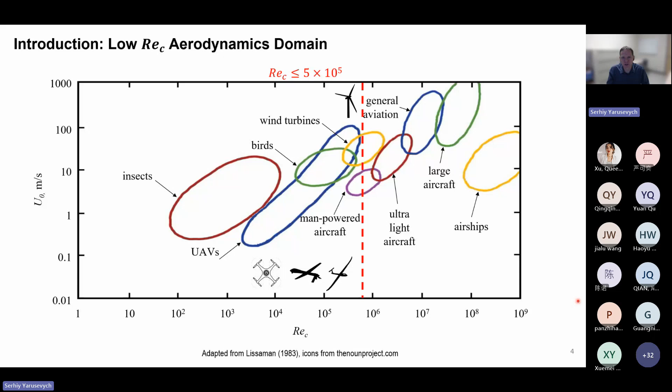Aerodynamics is quite different here from classical aerodynamics and warrants special attention for the prediction of flow development as well as the performance of the systems. In particular, what happens at low Reynolds number on the suction side is that the flow is exposed to the adverse pressure gradient, as illustrated here.

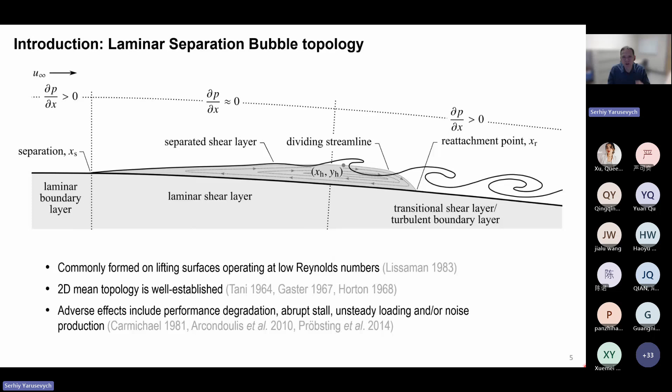I'm going to superpose on this cartoon an actual video of a laminar separation bubble visualized using smoke injection into the separated shear layer, and you will see that the phenomenon is quite dynamic. In the separated region, the flow is fairly laminar, and undulations start to develop, leading to the formation of periodic shedding of vortical structures. You can see quite rich dynamics of these structures. Some of them merge, but all of them start to break down close to the time-averaged reattachment point.

This phenomenon has been investigated since the 60s of the last century, and adverse effects associated with it include performance degradation of the airfoil, abrupt stall, unsteady loading, and noise production. This is why it's important to predict and understand this process on the suction side of the wing. The transition to turbulence plays a key role because it actually determines whether or not the flow reattaches or the airfoil stalls past separation, so stability considerations become quite important.

That's our next stop here. In the discussion, I would like to highlight that we will primarily focus on some of the results produced by our group. There are plenty of other research findings and many excellent papers on the topic, but I'll use our results nonetheless to provide a holistic summary of the state of the art in this area.

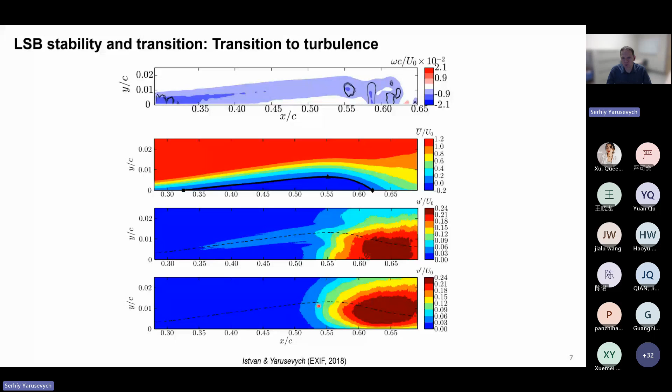The other two images show root mean square fluctuating velocity components, the wall-tangent and wall-normal, respectively. Along the separated shear layer, marked by the displacement thickness in the dashed line, you see amplification of disturbances that takes place quite rapidly and peaks around the reattachment region. With the wall-normal component, we see a similar story.

In the frequency domain, doing spectral analysis of these fluctuations, I can plot the Strouhal number, which is a non-dimensional frequency, in this case using the chord and free stream velocity for normalization, against the streamwise distance along the surface. We can identify that perturbations start to get amplified within a certain band of frequencies. Eventually, the amplification band broadens quite significantly, marking later stages of transition where perturbations break down to multiple scales. Finally, we start seeing spectra similar to the turbulent flow spectrum.

Looking at the stability predictions of this flow, we can do linear stability analysis on the mean velocities measured in the experiment. Here is a sample wall-normal velocity fluctuation spectrum in black, with the N factor from the linear stability analysis overlaid on it. You can see that we can reasonably well predict the frequency of the most amplified perturbation. In a dimensional sense, for this particular case, that's around 135 hertz or so.

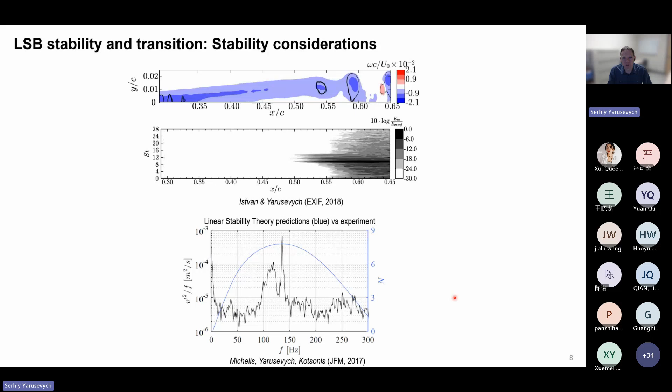So linear stability theory works quite well in predicting the initial amplification of perturbations and their characteristics for these flows, despite slight non-parallel effects and later on nonlinear effects present in the flow.

So further on the stability consideration, we embarked on a campaign to actually look at how controlled perturbations would develop in this flow. And for this purpose, we performed experiments on a flat plate subjected to artificially induced adverse pressure gradient using the top flexible wall here in the facility. And we're measuring in this domain where the laminar separation bubble forms. And we're using a plasma actuator located upstream of separation in order to introduce controlled perturbations of a given frequency

and amplitude. So here are surface pressure distributions that are shown in blue. This is the distribution that we obtained by tripping the flow, so eliminating the laminar separation bubble. And in black is with the laminar separation bubble. And you see the characteristic pressure plateau and pressure recovery due to the presence of flow separation, marked by S as the separation and R as the reattachment here.

So measuring the velocities, we use particle image velocimetry in this experiment, and the black points here show the actual measurements in the laminar portion of the flow. And what we wanted to do is trace the development of perturbations upstream, in the region outside of the field of view, where it is extremely difficult to actually measure minute perturbations in the flow due to the signal to noise limitation of any instrumentation.

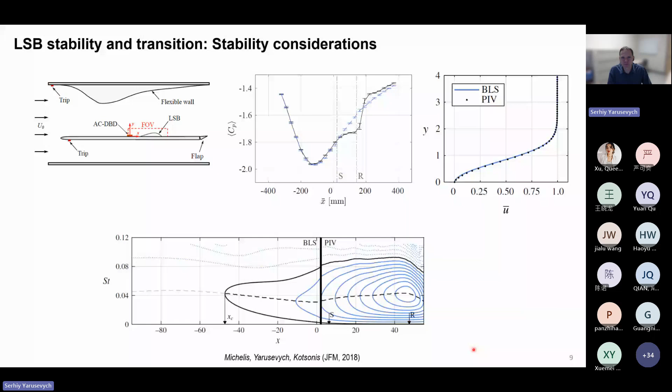Further on stability considerations, we can use controlled perturbations to see how they can be used to influence the flow development, but also gain further insight into some of the stability characteristics. And here I'm showing the results of the actuation on the laminar separation bubble. So the mean velocity profiles in the streamwise direction are shown. There's no actuation at the top, then continuous plasma actuation.

And here we're modulating the plasma actuator at different frequencies in the hydrodynamically relevant range. And you can see that the selection of the frequency while maintaining the amplitude input constant has a significant effect, with the minimum bubble achieved at an F plus of approximately 6 in this case.

And this can be explained quite well from stability considerations of the flow. So here at the top, I'm plotting the velocity profiles on which the stability analysis is done in solid lines. And I'm comparing these profiles to both the attached laminar boundary layer, fitted here as the dashed line, and this dotted line as the unbound free shear layer using the hyperbolic tangent profile.

So this plot at the bottom here shows the variation of the normalized growth rate on the vertical axis versus normalized frequency on the horizontal axis. And what you see is, as our shape factor here, denoted as H, increases from 1, 2, 3, 4, so from about 4 to about 6, we see a strong increase in the growth rates here in the transition process.

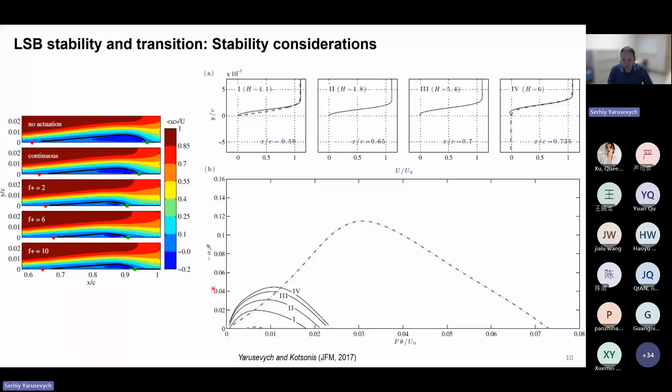So here, I think we lost you. Yeah, sorry, I'm back. Is that okay? Can you see the screen? Yeah, now it's back. Oh, yeah, I'm apologizing. Something must have happened over thousands of kilometers of the internet connection. Okay. All right, thank you so much, and apologize for this interruption. It doesn't seem to be any problem on the connection end, so I'm not quite sure. We blame Microsoft.

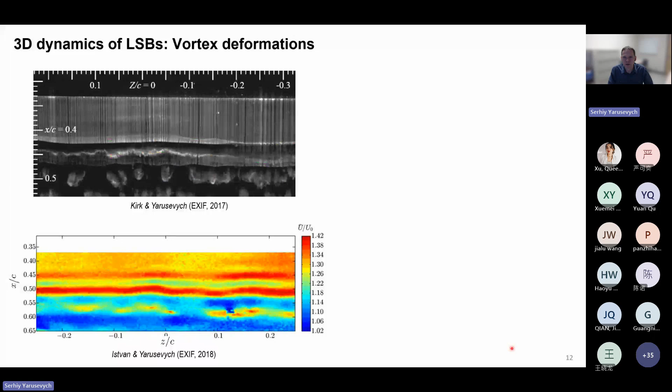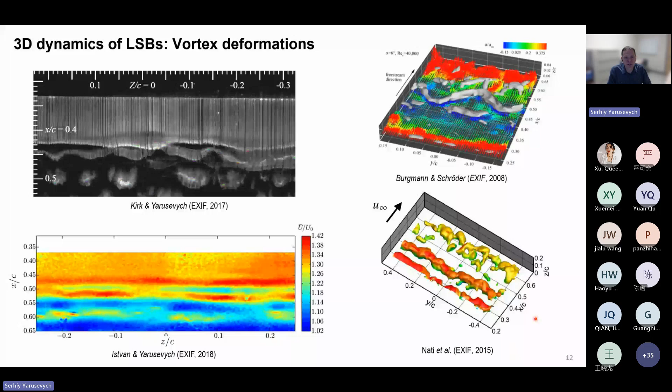So similar results were obtained by others, and depending on the particular facility, you can see more significant deformation, such as these ones done in the water tunnel by Burgmann and Schröder, with relatively high free stream turbulence intensity, or these done at TU Delft by Nati and colleagues, where you see more uniform formation of these structures and eventual breakdown using tomographic PIV. So we've embarked on investigating this three-dimensional dynamics using tomographic time-resolved particle image velocimetry.

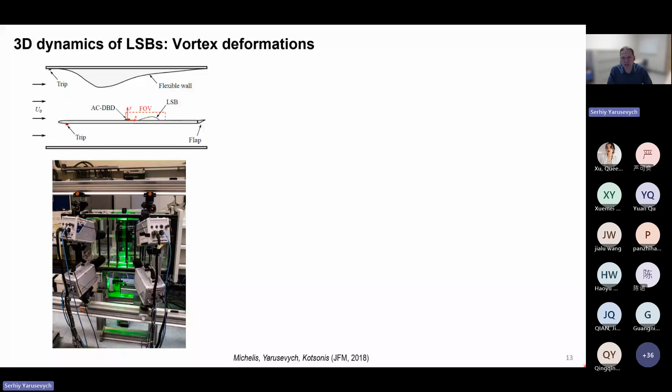The setup is shown here. The experiments were performed on a similar geometry on a flat plate, as discussed earlier, and the tomographic PIV was restricted to this region at the aft portion where these vortices are forming. So there's Q criterion highlighted structures with colors indicating the strength of spanwise vorticity. I'm going to play that as a video here. What you see is strongly deformed structures breaking up in the aft portion of the laminar separation bubble.

And what we wanted to do is understand where these deformations are coming from. There's quite significant debate in the literature, or at least there was at that time, of the nature of instabilities that are causing the breakup to turbulence. So when we're analyzing these structures, what was peculiar, so these are histograms, and we see prevalent streamwise wavelengths of these structures centered at this mean value here.

But we also see prevalent spanwise wavelengths to these structures, which is about two times the streamwise wavelengths in this case. So that hinted that there is some fundamental instability that may be in play in this flow that results in the connection between the breakup and the characteristics of the structures themselves.

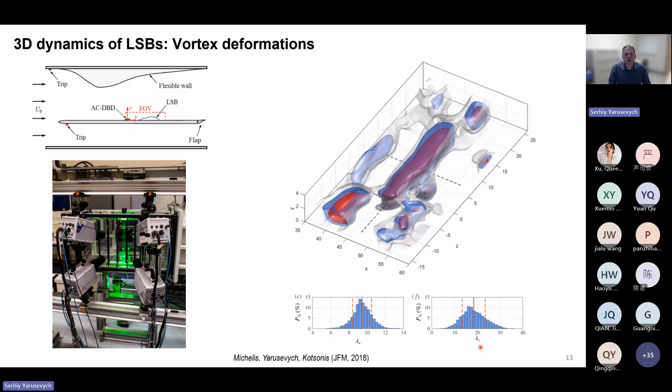So looking more into details in the stability analysis here, I'm plotting the growth rate versus streamwise distance, and I'm looking at the normal mode, shown in solid line, and the first oblique mode of perturbations shown in dashed lines. So through the stability analysis, the long and the short of it was that, as expected, our normal mode transition is dominating. So we see the more negative growth rates, which means that these perturbations are more amplified than oblique perturbations.

However, our oblique waves that are present in the flow are also amplified, and amplifications are not trivial, and you can see this from the N factors here. So they're amplified less. So at any given streamwise distance, we have a lower N factor for the oblique mode than for the normal mode. However, not all of them are dampened, and oblique modes of specific characteristics and oblique angles are amplified in nominally two-dimensional flow.

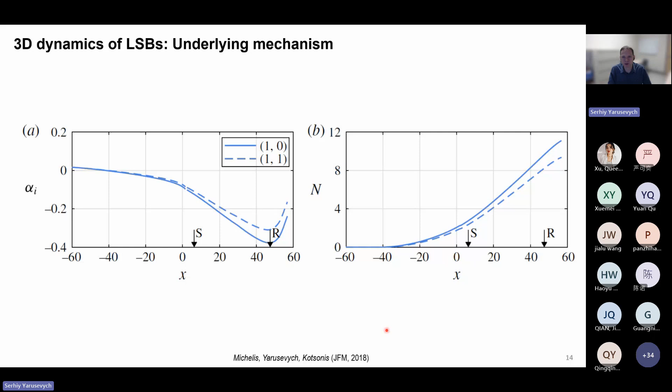So using a simple cartoon, what we can illustrate is if you go with superposition of normal mode and a pair of oblique modes, because those do come in pairs, what you can have is the deformed wave fronts, right? And the degree of deformation of these wave fronts will depend on the relative magnitude between the two modes. So in this case, the relative magnitude is in favor of stronger oblique modes, whereas in this case, it's weaker oblique modes in comparison to the normal mode.

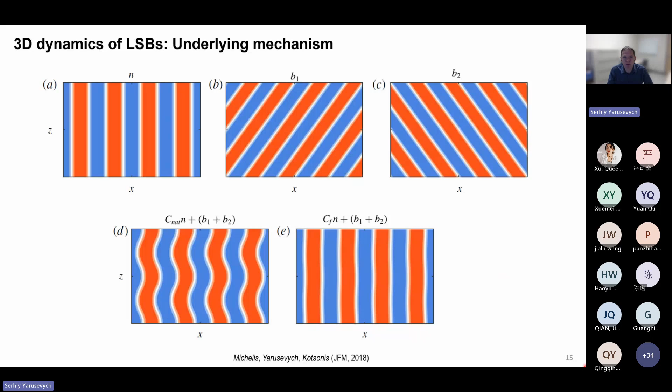So in order to verify this, although the results were obtained on the experimental data, we wanted to confirm that we can actually control these deformations by changing the amplitude of either oblique or normal mode. In our experiment, it was easier to control the normal mode. So what we've done is we used a plasma actuator that is spanwise uniform and located upstream of the separation to introduce a controlled spanwise uniform normal mode and see how that would affect the transition process.

And based on the numerical and analytical calculations, with the stronger normal mode, we would expect to see less significant spanwise deformations. And on the left, what you see is the natural transition video for comparison, the one that I showed you already, highlighting the structures that we're seeing in the laminar separation bubble. And on the right, you see the forced one.

And as you can clearly observe here, as we're forcing the natural normal mode, what happens is we get much stronger spanwise uniform structures with the spanwise deformation suppressed, supporting the analytical conjecture that the superposition of the two modes and their relative magnitude may play a role in determining the initial deformations of these structures.

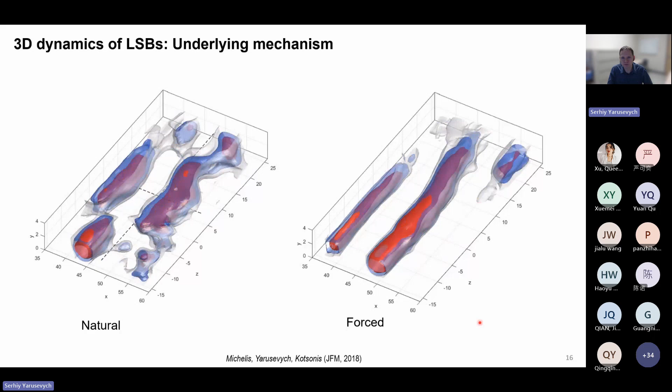We can also do this the other way. So instead of forcing the normal mode, we can introduce an oblique deformation and see how that would develop. And for that purpose, we performed the following experiment using two actuators upstream of the laminar separation. The first actuator here was 2D uniform as before, whereas the second actuator was segmented in the spanwise direction to introduce perturbations with fixed wavelengths.

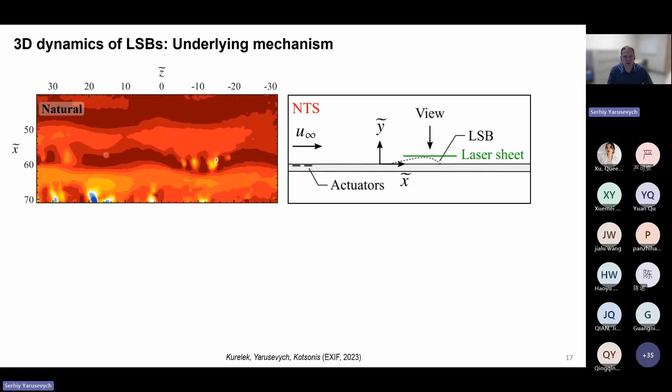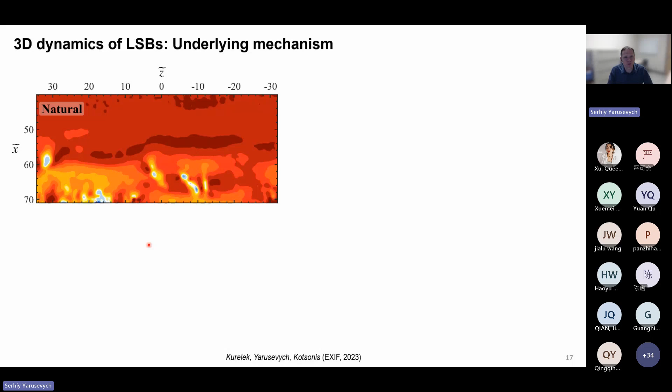And on the left, you see natural transition PIV from the top view, cutting through the tops of the rollers, so they appear as dark bands. So you see these structures forming and undergoing deformation, very similar to the experiments that I showed you with tomographic measurements. And here we're introducing two-dimensional disturbances, and as before, we can regularize the shedding and reduce the spanwise deformations observed in a natural flow.

And what we also can do is we can induce controlled spanwise deformation. So here at 25 wavelengths of streamwise vortices, you can see that we can, in a controllable manner, introduce these deformations. And the results showed that these deformations are amplified, are naturally growing in the flow, confirming our conjectures further regarding the nature of these three-dimensional dynamics that we observe.

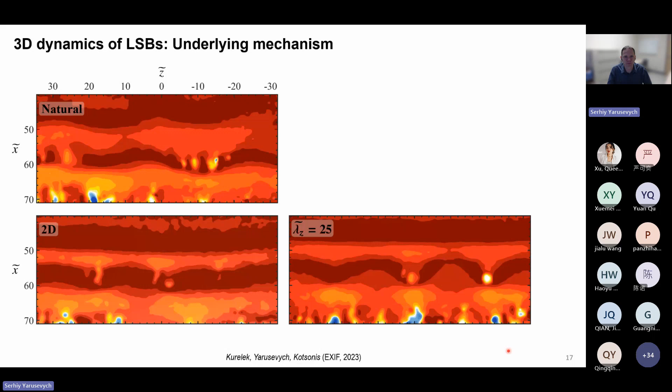However, there are also other conjectures in the literature. In fairness, they need to be acknowledged. There are suggestions that these may be attributed to local elliptic instabilities in the braids. They can be Görtler-induced instability and some other results. What I would like to propose here is that perhaps it doesn't really matter what the initial perturbation origin is. We've constructed a relatively simple model to illustrate that as soon as these perturbations appear, they will be amplified naturally in the flow. And in order to convince you of this, I would like to show the results here.

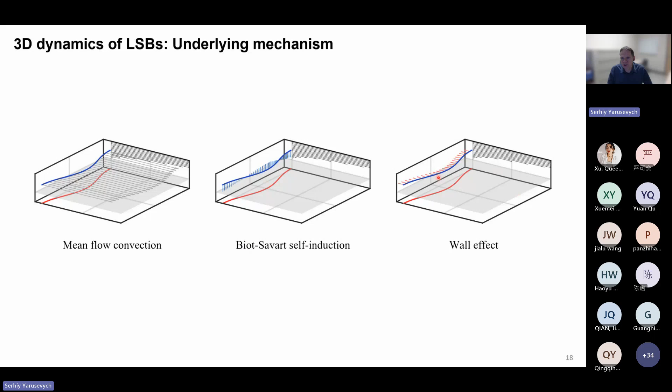So what we're doing is a model which combines the mean flow convection, basically taking mean flow measurements and imposing the mean shear in the flow, as shown here. Inducing Biot-Savart, so we're introducing a vortex filament in the flow, as shown in blue, and we're adding its mirror image counterpart to model the wall, modeling Biot-Savart induction. And the wall effect, of course, is introduced here. So combining these, we're introducing a filament with minor undulations in the imposed flow. And I'm showing you how this will develop using a simple analytical simulation here.

So the structure will advect as I play the video, and on these two images, I'm showing the top view, basically a plan view of these structures, and here a front view looking upstream, seeing how these deformations develop. And what you see is that these deformations will naturally amplify due to self-induction of the structure and shear effects. And what you also see here is that these structures will start developing wall-normal deformations as well, similar to hairpin structures with the tips lifting away from the surface.

So regardless of the nature of the initial deformation, the moment these structures have any spanwise undulations, these will deform naturally in the flow that these structures are exposed to, which will lead to deformations and eventually vortex breakdown.

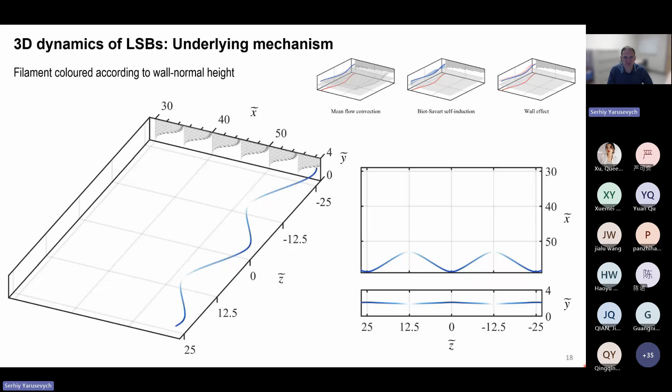So the majority of these studies in prior literature, including our own work, has been done on two-dimensional airfoils. And you can see that these structures and the flow development is strongly three-dimensional and unsteady and quite complex, even on two-dimensional geometries. But in reality, of course, all of our applications involve some finite geometry effects, such as wing tip and wing root effects, or blade tip, blade root effects. And it's important to understand how the low Reynolds aerodynamics flow development takes place on practically relevant geometries.

So with that, we embarked on looking at the finite wing geometries. So this is just a planar wing on an NACA 0018 profile, and we're looking at first tip effects, and then we'll look consequently at the root effect. So here we're doing measurements using stereoscopic PIV at different planes, moving towards the tip, and you're seeing flow development very similar to the

bubble on airfoil geometry. These are spanwise velocity profiles shown at different spanwise locations identified by the planes shown here. And I'm going to be moving towards the tip, and as I start moving closer towards the tip, you will see significant changes in the flow. So our separated flow region diminishes and eventually vanishes at this point as I go closer and closer to the tip. So at this location, I don't see the blue regions that would be indicative of reverse flow, so the separation seemed to be suppressed.

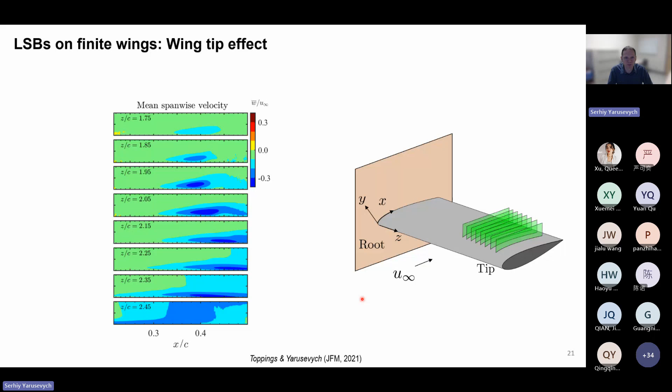So reconstructing this geometry using multiple measurements, I can construct the separated plane in this case, the surface marked by red. So rather than the separating streamline, that would be a separating surface. And you can see that the topology of the laminar separation bubble on the finite wing will be an open separation with the flow going into the separation bubble as shown here. And mind you, these are not cartoon sketches. These are actual mean flow reconstructions based on finely spaced stereoscopic flow measurements.

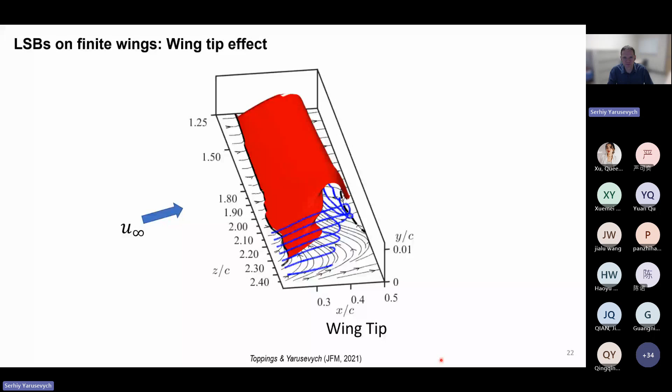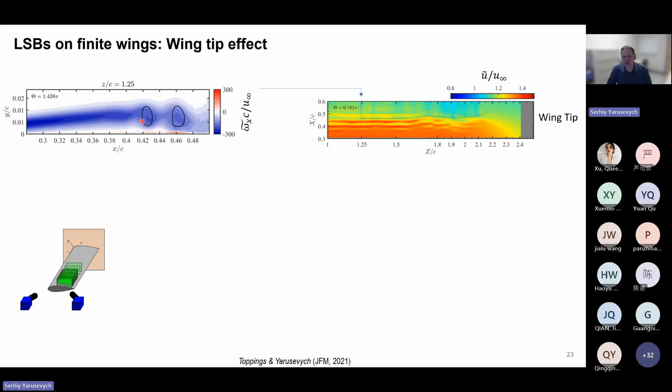So looking at the particular planes here, starting from plane at Z/C of 1.25, I recover in the planar measurements this classical formation and shedding of the shear layer vortices. And as I approach the tip, I still see this at Z/C of 2. However, closer to the tip, the dynamics will start to change quite significantly. So our roll-up location is moving downstream. And eventually, very close to the tip, I don't see any evidence of the shedding in the results.

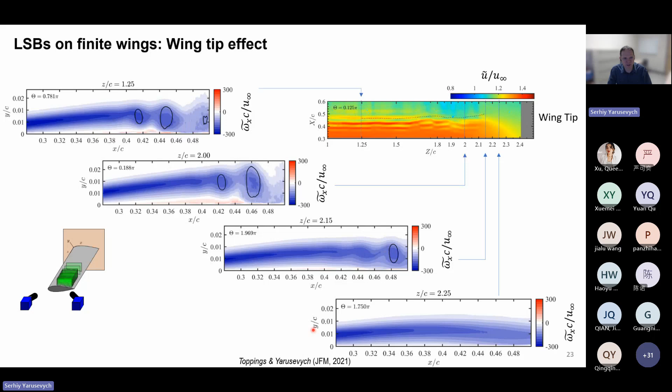Here I cannot get any closer to the wall due to reflections, but obviously as we have an incoming boundary layer, in this case a turbulent boundary layer on the wind tunnel wall, we will suppress this region due to the influence of the turbulent nature of the flow and the junction flow development.

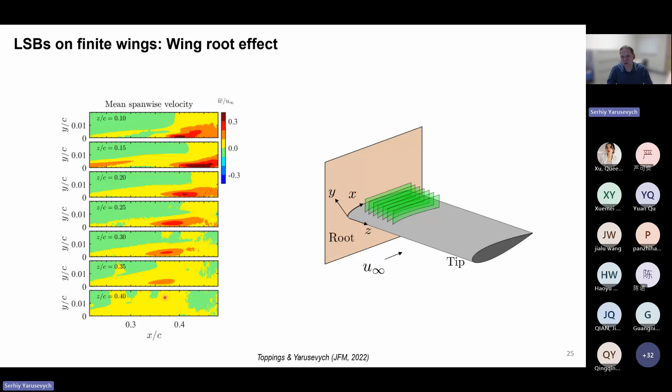Similarly, I'm using stereoscopic PIV, so I can look at the out-of-plane motion here, and here I will have the flow towards the tip from the root, so positive spanwise velocities. And again, these are quite closely aligned. The peaks of this spanwise flow are closely aligned with the location of the separated flow region.

So stitching together the wing root and wingtip regions, I can get the overall view of the structure. So here is this separation surface, identified and colored by the wall normal distance. And you can see that it's an open separation on both ends. So I have an inflow here and an inflow at the tip. And although the height varies quite a bit, it remains reasonably two-dimensional in the core; it gets thicker towards the tip and towards the root region before opening up to the flow.

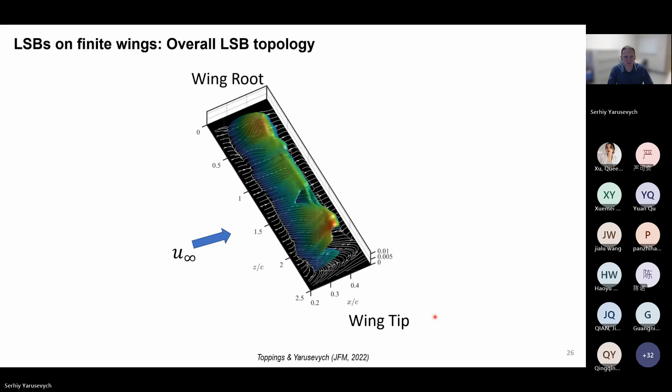Looking at the dynamics in both regions, I am recovering reasonably two-dimensional flow dynamics here, and the changes are confined to the regions close to the root and the tip here. What's interesting to us here is that, as any senior student in aerodynamics would tell us, we are expecting to see a change in the effective angle of attack here. And of course, that change in the effective angle of attack from root to tip should change the characteristics of the flow. And it does.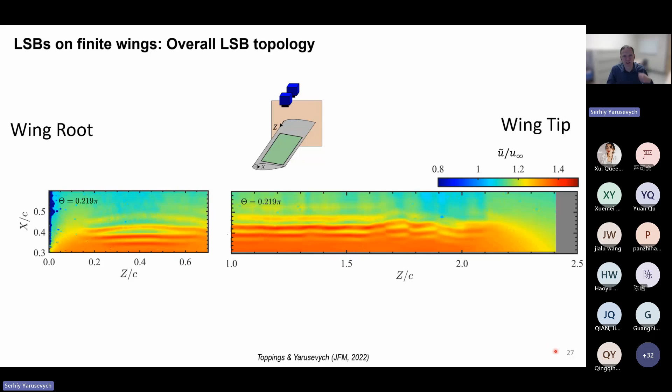However, it doesn't seem to be changing the dynamics significantly. So the characteristics of these structures seem to be locked onto the instability mode dictated by the angle of attack at the root region. So the laminar separation bubble dynamics does not seem to be responding to the effective angle of attack changes across the span and the finite geometries here.

We move on to the transient effects in my talk related to LSB bursting and reformation. So specifically, what happens very often, and the danger of these types of flow, is that these laminar separation bubbles can burst or suddenly change in size. And that happens when either Reynolds number or angle of attack change and cause the bursting process. So for example, angle of attack increasing or the Reynolds number decreasing. It also can change in response to perturbations in the incoming stream. And this is a very dangerous process, particularly for gliders, as it causes a sudden stall and loss of control for the pilot.

So here we wanted to see how the bursting and reformation of the bubble take place, and primarily what the time scales are, as well as the physical mechanisms involved, in order to gain insight into these unsteady processes that we haven't had a chance to explore in the past. And the results I'm going to show you initially involve the changes in the bubble dynamics due to changes in the incoming free stream. So here we can be decreasing the free stream in the wind tunnel facility, as shown by the red line, or increasing it, using the blue line here.

So first, we're going to focus on what the instantaneous flow field looks like for the limiting case. So this is the higher Reynolds number where we should have a laminar separation bubble. So this is the plan view of the measurements, and we're cutting through the laminar separation bubble. It's a little bit thicker at the middle of the wing here, as seen on this image. And I'm seeing the corner separation here due to the junction flow.

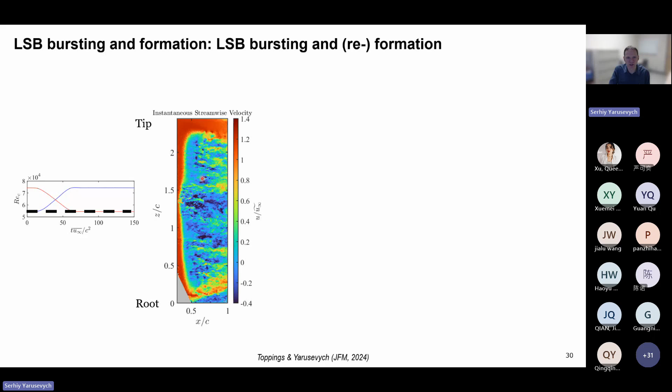So the other limiting case is the fully stalled case, and the corresponding image is shown here. So you see negative velocities here across the span in this instantaneous image. And this is indicative of the flow separating close to the leading edge and remaining separated until the trailing edge of the wing.

So you see bubble bursting, and you see bubble bursting initiating from the middle plane, where the bubble is the thickest. Now this would be, of course, subjective to a particular geometry and conditions. So it would start at the thickest separated flow region, and it moves outwards, eventually spanning almost the entire wing, with the exception of the tip region where wingtip effects cause local suppression of flow separation.

These are, of course, associated with a dramatic change in the lift, so drop in lift, and notable fluctuations in the lift due to the associated shedding of larger scale structures in this flow.

Okay, the opposite reformation can be induced as the Reynolds number is increased instead. And here I'm showing the video of a response of the flow to increasing the Reynolds number, and the associated change in the lift coefficient is shown in this pink magenta color.

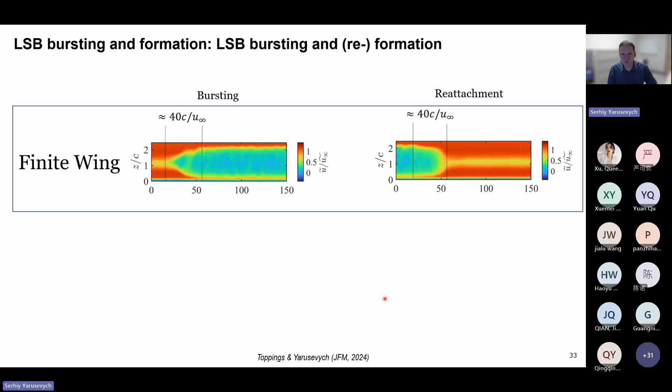What's interesting is that if I compare this to the 2D airfoil, and we've done the experiments for comparison, the bursting and reattachment process seem to be happening much quicker, about twice as promptly as on the wings. This is attributed to the lack of the root and tip effects, of course, in this geometry.

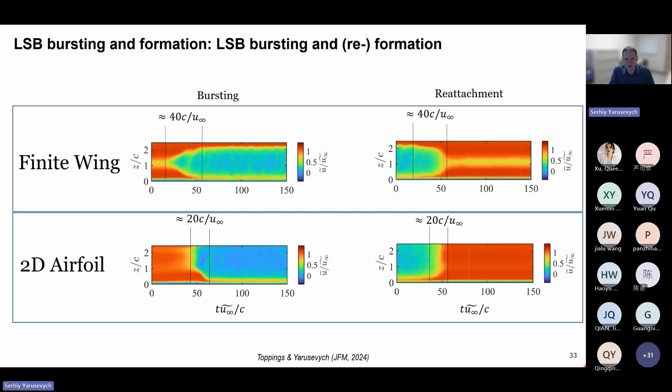We've also done experiments with changing the angle of attack. This is a busy slide, but I'll walk you through this. What's most important here is to focus on the effect of, on this axis, the rate of change of the angle of attack, normalized appropriately. And this delta D step is the time it takes in convective time units for flow to reattach or stall. Multiple configurations: airfoil stall, airfoil reattachment, wing stall, wing reattachment.

What's interesting is that as I increase my rate of change of the angle of attack, I'm able to decrease the response times, and I'm reaching saturation limits here at around 10 convective time units. And these are comparable to Reynolds number changes. So the ones that I showed you were these characteristics, around 40 and 20, but at lower angles of attack, I can get slightly lower delay times.

But overall, what's important here is no matter how the bursting is induced, either through the change of the angle of attack or the change in the free stream velocity in your operating system, it takes on the order of 10 convective time units for the process to be done, which has important bearings and important consequences for flow control characteristics and the aircraft control characteristics in particular.

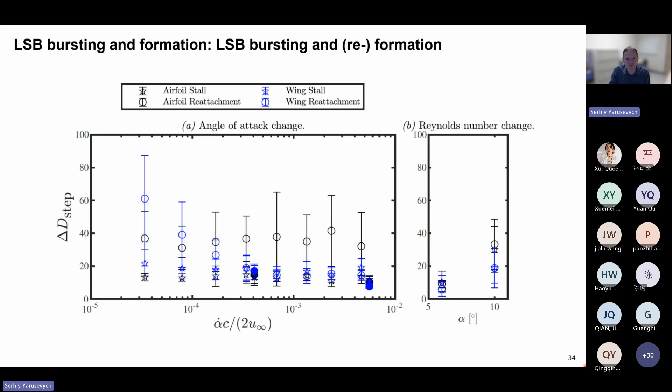And finally, to close off, I wanted to show you recent results illustrating how this laminar separation bubble forms to begin with. These experiments are done in the towing tank facility, starting from rest to mimic the startup of a system. What I'm showing you here is how the free stream velocity changes in this plot versus how the flow over the airfoil, in this case an SD profile, changes with time. There are two fields of view shown here, and these are not time correlated, so they're done in different experiments.

So what you're seeing is the flow accelerating, boundary layer development on the bottom side, and suddenly we see the appearance of perturbations in the entire field of view, and these perturbations develop as time progresses. These are streamwise velocity results at the top. I'm going to play that video using spanwise vorticity.

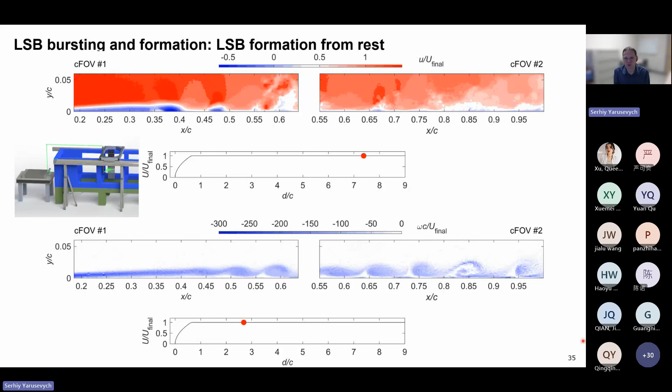And here, what I would like you to notice is that the development of these perturbations seem to happen almost instantaneously across a finite region. And it happens only when the airfoil is finished accelerating to steady state flow. And it takes quite a long time in convective time units, so distance traveled over chord here, for the flow to settle on quasi-steady state development of a laminar separation bubble, very similar to the one that we've observed before.

So the characteristics of this flow development, without diving into too much details, are indicative of an absolute instability, similar to what's observed at the onset of KH instability in free shear layers. That progressively gives way to convective instability when the laminar separation bubble contracts to the quasi-steady formation here.

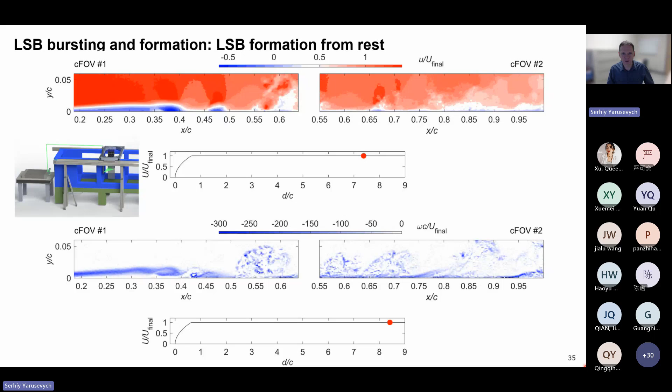So I'd like to summarize the talk and open the floor for questions. First, a quick summary of the LSB topology and dynamics that are largely governed by the formation and evolution of shear layer roll-up vortices leading to laminar to turbulent transition. And these structures arise due to rapid amplification of disturbances in the shear layer, leading to shear layer roll-up.

What's important to note here is that linear stability analysis confirms that there is a continuous spectrum of characteristics of the flow instabilities spanning laminar boundary layer and separated shear layer, linking laminar boundary layer, LSB transition, to upstream flow development, as one would expect.

The flow development in the aft portion of the bubble is highly three-dimensional, even on nominally two-dimensional geometries. It manifests in progressive deformation of shear layer vortices with subsequent vortex breakdown. And the initial deformations may be attributed to the growth of oblique waves if present in the flow, which are inherently amplified in the bubble. And as we mentioned, this inherent amplification would take place in presence of any minute three-dimensional perturbations to the main normal mode.

On finite wings, open laminar separation bubbles form due to wingtip and wing root effects, and away from the affected regions, LSB topology and dynamics appear to be quasi-two-dimensional, with the shedding process and dynamics of the bubble locking onto a common frequency despite effective angle of attack variation across the span.

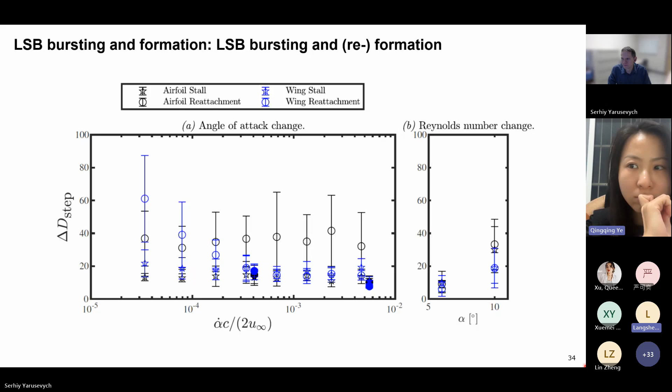Can you turn to the 34th slide? Oh, 33, sorry. The bursting of separation starts at the mid-plane. But I am curious about when the angle of attack is not zero, will it still start at the middle span? Because there will be a difference between the suction and the pressure surface when the angle of attack is not zero.

Okay, yeah, so just to be clear, in this case, the angle of attack is not zero. So the angle of attack here is around 10 degrees, I believe. And the tip vortex due to the angle of attack will not affect the start location of the bursting of the separation bubble. So that I understand, the question is how the bursting will progress if the angle of attack is aerodynamic zero. Is that correct?

Yeah. Okay, so the results that are shown here for the audience are at a non-zero angle of attack, so it's a close to stall angle, around 10 degrees in this case. And if the angle of attack was close to the aerodynamic angle of attack zero, would the progression be similar? We've done results at 5 degrees, and the progression is quite similar.

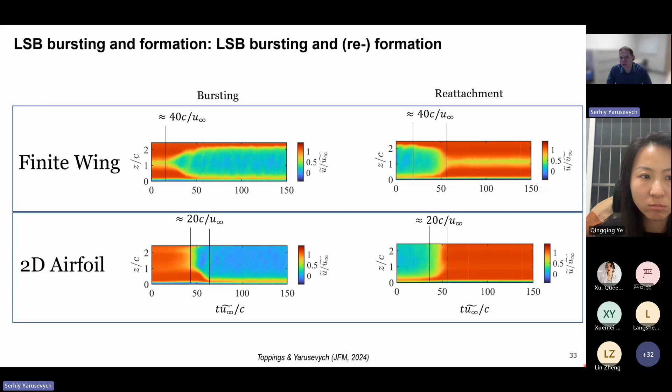Yeah, so in this particular situation, there will be no tonal noise generated because the separated flow region is far enough upstream of the trailing edge. Maybe I can allude to this. So the vortices are broken up by the time they reach the trailing edge. So they're forming around this region, and they're fully incoherent in a spanwise direction by the time they reach the trailing edge. So it would be broadband noise in their acoustic signature. Okay.